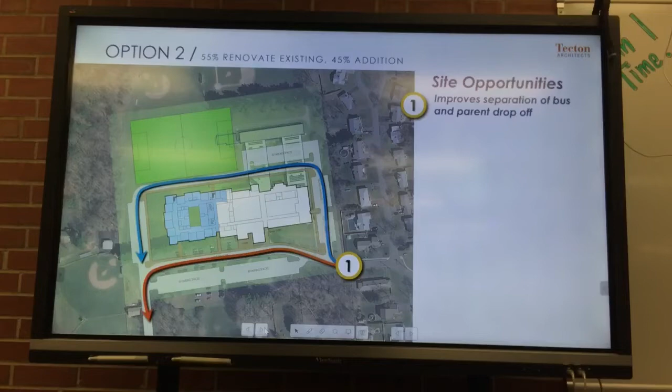Some of the site features are opportunities we'd have to work through, the proper circulation, where to enter the site, where to exit the site. But you could have a loop road where, if the blue was parent drop, you have plenty of areas for queue. If the orange was bus, you have immediate right of way into the site and proper drop on the bus side, a nice straight drop zone in front of the school, and then ample parking dispersed around.

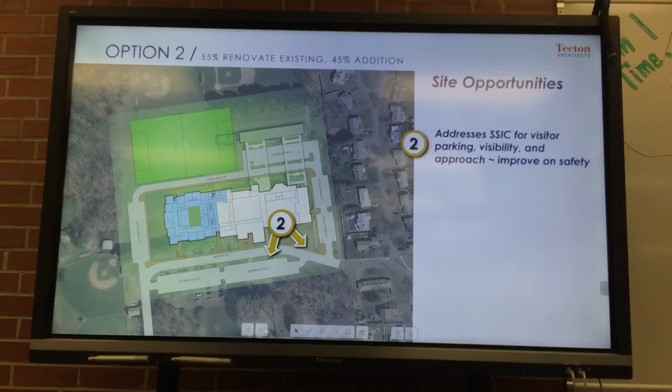If you keep on clicking, we'll go through each of the pieces. One of the benefits is we push some of the visitor parking and the bus drop, the approach to the administration suite, to the entry of the building, a little further away, at least 70 feet away, according to school safety infrastructure guidelines. So that's a benefit.

The other piece is it gives you a little bit more green space around that blue addition. You'll see that green buffer there that, as we spoke to at the last meeting, the reintroduction of outdoor classrooms, or the reconnection of outdoors through the last few years, has really taken hold and will continue to. So this option provides that opportunity.

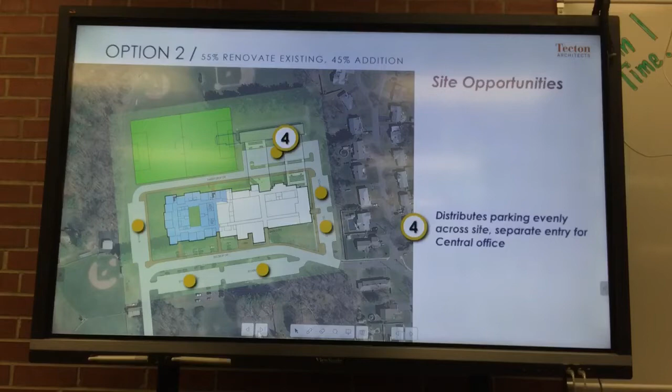As I mentioned, it equally distributes parking around the property. In this particular instance, on the far right, there's two dots there. The central office would take that portion, and you'll see it in the floor plans. So you could kind of compartmentalize the site from a parking perspective and from a traffic delivery standpoint. Again, it's not perfect, but you can at least see the opportunities that exist here.

We would temporarily lose the use of that soccer field, but we could recreate it when we're finished, and that's a representation of that. We would turn it, the orientation a bit, but you'd have some pretty good parking for community immediately adjacent to the fields as well. And then lastly, we tried to maintain, and we heard this at our walkthrough, an improved relationship between the athletic portions of the interior of the space with the exterior play fields. So something that we can strive to achieve on this option.

As far as the building plan, and I have 11 by 17s, I wanted to walk through these, and we'll leave them with you to study at your leisure after this, because I know there's a lot of detail and a lot of things to absorb. So I'm going to try to hit the big picture.

So if you split that plan in half right down the center, the right side basically remains. So we're keeping our auditorium, we're keeping our gym, we're going to keep our kitchen, servery, cafeteria. We're going to completely renovate them, mechanical, lighting, finishes, all that. But we're going to keep those core spaces. It's most efficient to do that in a renovate-as-new approach.

In this particular option, we're suggesting that we possibly relocate the media center, the library, learning commons, whatever you'd like to call it. It really wants to live at the heart of the school and be more open, more visible to the students. So we're taking over the space that currently is art and STEM.

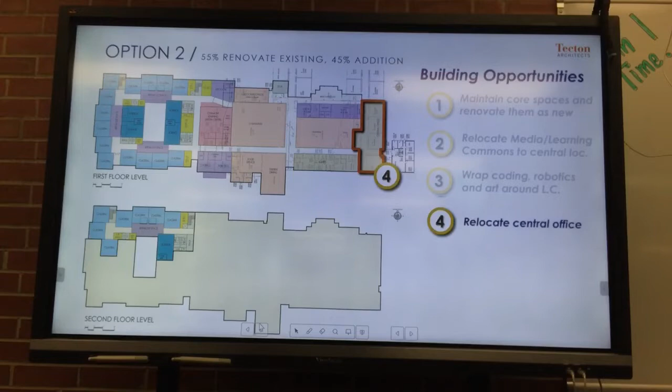Relocate central office to the far end of the building, which on this plan is on the east side of the building where there's classrooms now. That meets about 5,000 to 6,000 square feet of program in their ed spec, so it's close to that number. It could have its own separate entrance, and it could have a relationship, as it does today, to the existing admin area. It's keeping it essentially on the same end of the building, it's just shifting over.

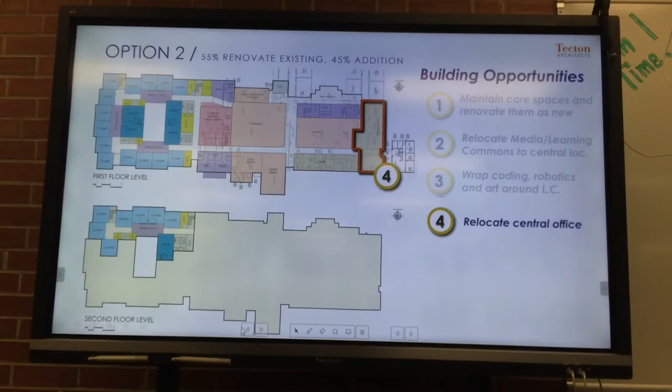When you say central office, you're talking about the central office for the actual middle school? You're not talking about the Board of Ed? I'm talking about the Board of Ed. Oh, you are talking about the Board of Ed. Yes, the Board of Ed. Okay, I wasn't quite sure exactly what to call it, but that orange area, number 4, is the Board of Ed offices.

We would remove the smaller portion that you see there and move them into the building. And then the existing administration, guidance, and nurse area would be completely renovated to resolve all the ills that exist today, but would remain essentially in the same location.

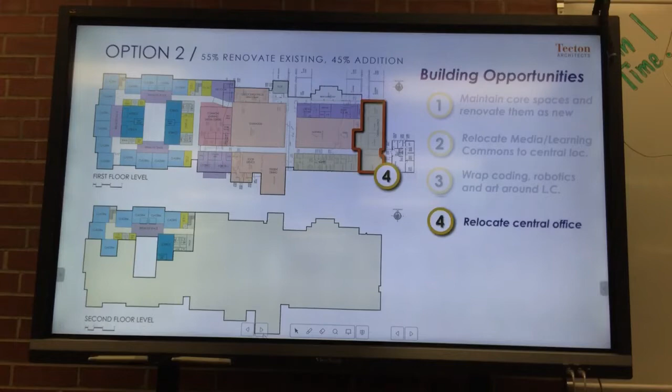The biggest piece in this option is creating what we call a learning community. We're trying to create learning communities by grade level, where right now your current ed spec has 7 classrooms per grade level, plus 2 science, so 9 total classrooms.

What we're trying to establish is some breakout spaces, shown as purple areas in the 11 by 17s, where we push the corridor walls 5 feet in either direction. That supports today's more contemporary learning environments with project-based learning, so students can learn in the classroom, but also in the hallway, working in smaller groups.

We're trying to establish that in this new addition, and you can see it's a very simple circulation, a U-shaped circulation.

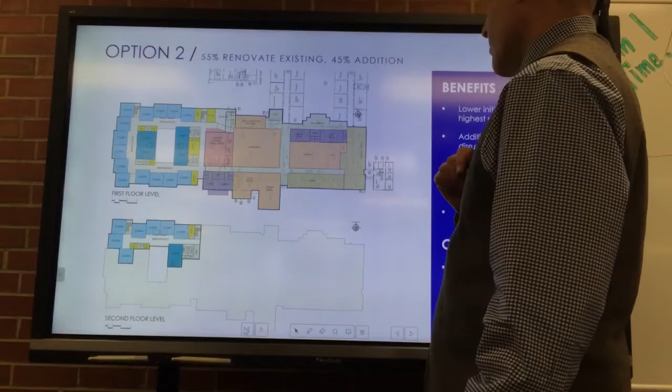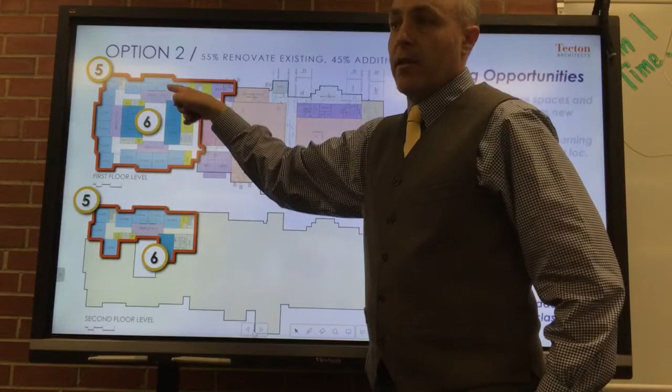What we tried to do is align existing hallways. So this part here would be one grade level, this would be another grade level, with two science rooms for each, and breakout space on all three sides. There's basically a light well or courtyard to make sure all the educational spaces have direct natural daylight.

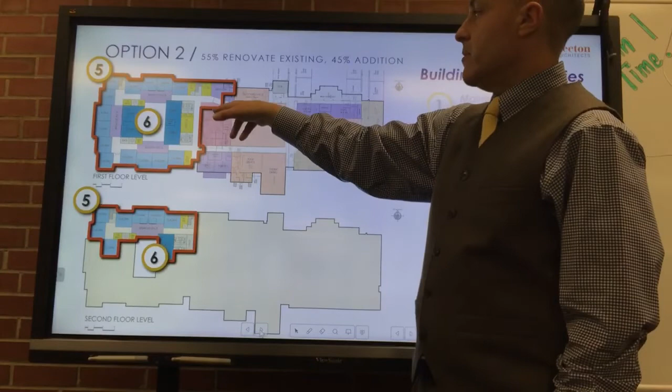The yellow spaces sprinkled around are all the specialized ed spaces. We've learned to push those into the learning communities as best we can, so they're immediately adjacent to the students where the need is. There are larger spaces like OTPT and the SLC that need more room, so we put those over on the side there.

So basically you could do 6, 7, and 8, or whatever kind of structure you want, but that's how this particular addition is arranged.

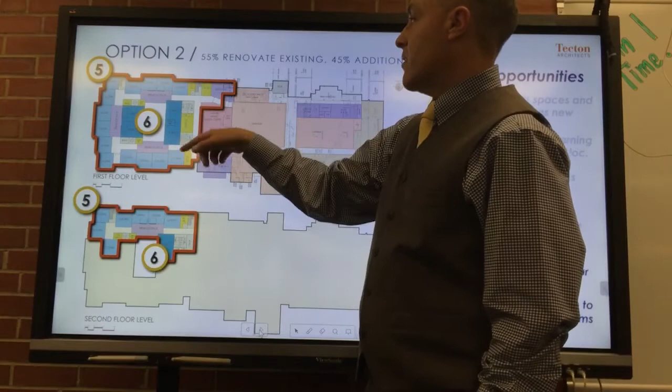Really what we wanted to do, and what you want to do in middle schools, is make sure students can live in their learning community, their age-appropriate grade level, work in teams, and then visit the core spaces without having to travel through another person's neighborhood or learning community. That's what we strive to do here.

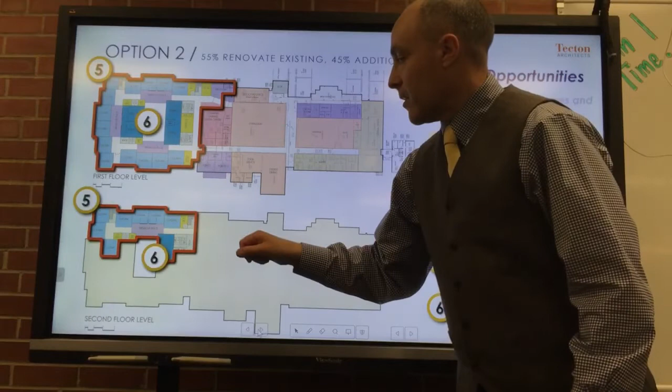It's a little forced on the second floor, a little bit clunky right now, but that could be cleaned up. So this plan gives you that 80... it's a little less efficient, in the 87,000 square foot range, so it still needs to be squeezed a little bit. But that's the first shot out of the box for renovate as new.

There are plenty of other options we could look at. We could leave more of the classroom wings, but what we wanted to show in this option is that you would build this addition first, then swing all the students around into it, and then renovate or modify the rest of the building.

Would the whole first floor be on one level? Because I know you mentioned there's a grade change outside the gymnasium currently.

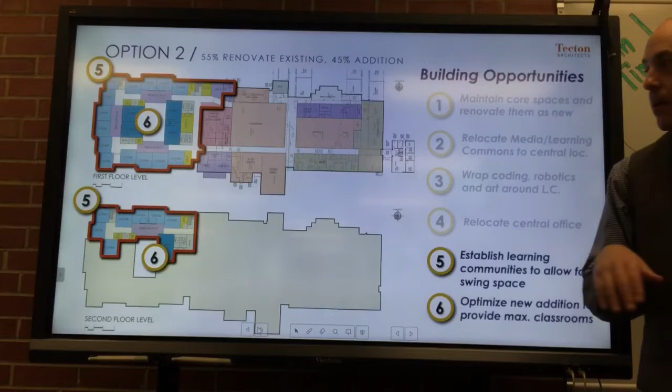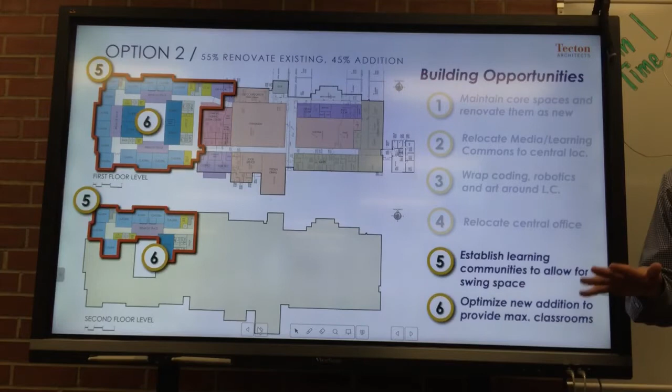So what we would do, we squeezed in some ramps here, and we'd level set the addition down to the grade level, which is about 30 inches lower than the gym. Inside we'd have 1 in 20 ramps, so you don't need railings, a very gentle slope. So to answer your question, this part is about 30 inches lower, with ramps strategically located in these two areas, so there's universal access to all of the core spaces.

We have an elevator and two stairs.

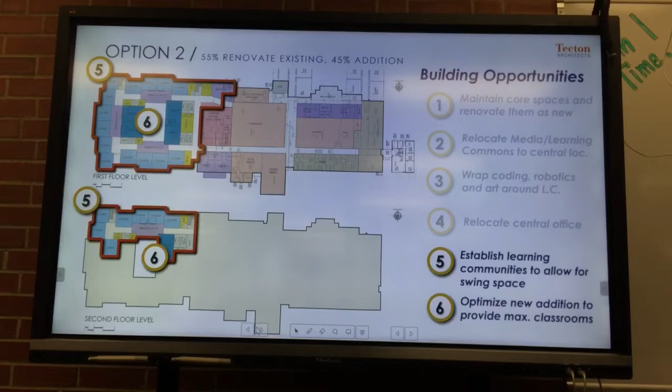Some of the challenges with this option are that we left the locker rooms' arrangement as is, a split level like we walked through at the last meeting, so the challenges related to the locker rooms remain in this particular option.

We'd have to do a little more exploration. I think there's enough room to turn it and push it up and still maintain it in a temporary fashion until we have enough room to find its permanent location.

I would have to understand, the soccer field shown there is like high school regulation. I'm not quite sure exactly what it's used for. It's currently used for high school and middle school players, for this middle school as well as the local town travel league, and all the older teams use it. Right now in the spring, because lacrosse teams use the high school fields, the high school players and older youth players use this field all spring. So that field is used year round.

So that has to stay at that size. Right, because if that field disappears for 2 years, it's a huge impact, since we have other outside people using the fields. The town will lose revenue if we have to boot them off.

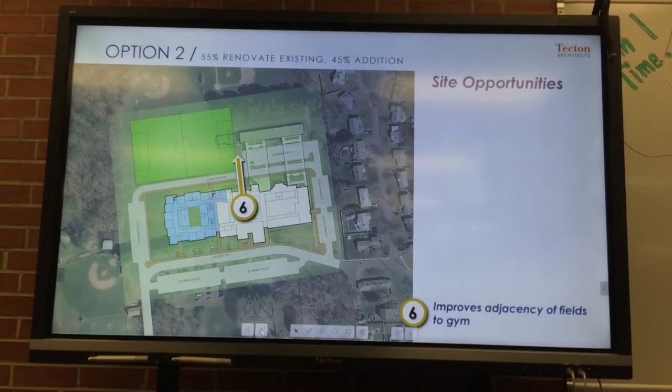So yeah, just to kind of wrap up here, let's talk about some of the benefits and challenges. Obviously, you see a better ratio of benefits to challenges than on the previous one. Of the schemes, this is going to be the lowest initial construction cost. The renovate-as-new, obviously, is going to have a higher reimbursement rate, an additional 10% over new construction.

The addition can be built without disruption to students in the existing school, so essentially we create the swing space ahead of time, eliminating the need for modular classroom buildings. We have good flexibility in terms of 21st century learning because it's a nice mix of both new and existing, with an ability to really rehab what is here.

As we've talked about before, there's a lower operating expense with the reduced footprint from going to this partial second story. The challenges are it's going to be a little bit of a longer construction duration compared to the next scheme we're going to show you, since there are more phases here. So in terms of overall time of disruption to students and staff, it will be longer. And as mentioned, with the existing building you'll have additional work, whether it's the abatement we talked about, the structural systems, or the mechanical systems. Obviously, once you start opening walls you find things, and it gets a little more difficult sometimes to renovate existing.

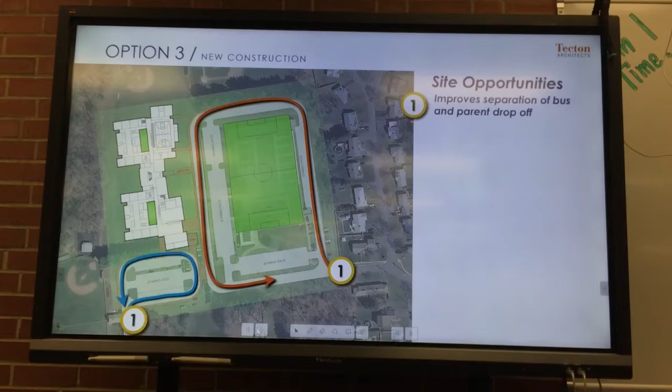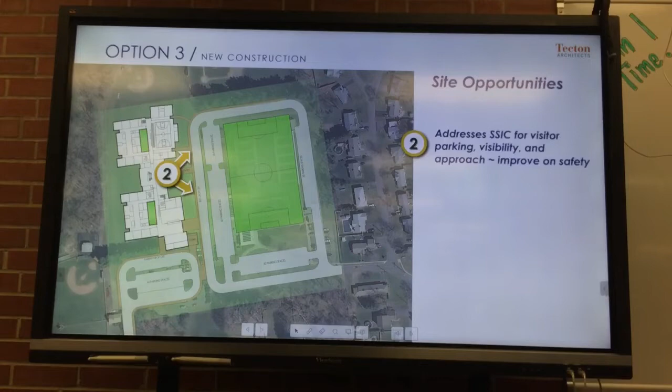This kind of sets up pretty well for, again, a similar loop road. What's nice about this, and I know it might be a little painful to get to this spot as far as construction and phasing, but it does give you good circulation around a community field, good access, good parking - those kinds of things. It puts green field, it puts the building further away from the neighbors and gives you a buffer on both sides, both on the east, which is to the right, and on the south, which is to the bottom of the screen, because it pulls parking further away from everybody. You maintain your visibility from the administration suite across the entire site, so you can see who's coming and going - good site control.

You'll see there's a pocket, a recess there, and that's where the media center is, right near 2 there. So it creates a nice opportunity for some outdoor protected learning. Good transparency through the building.

We did distribute the parking somewhat evenly, and before we get too far into this, the plan does not currently show the Board of Ed offices anywhere, because I wasn't quite sure with a new build, does it want to be its own or does it want to be attached? We will obviously, after these conversations, work that into the plan. I just wanted to make sure we didn't forget about it. We weren't quite sure what the preference was.

So anyways, parking across the board - the parking, I should mention, it's around 180. We can probably get 200 parking spaces easily if it's needed. In addition to what you have today. I thought you had 230 in this. When I had 230 and 182. Okay, yep, I think.

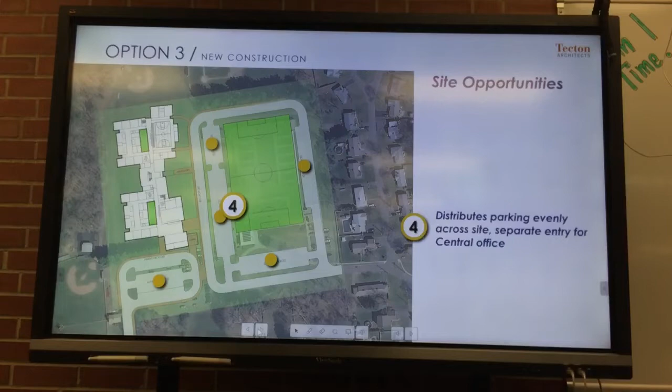This preserves the soccer field when completed, not during, so we'll have to look at that challenge now and see what we can do. The gymnasium on this plan is on the top right, and has pretty good access to fields.

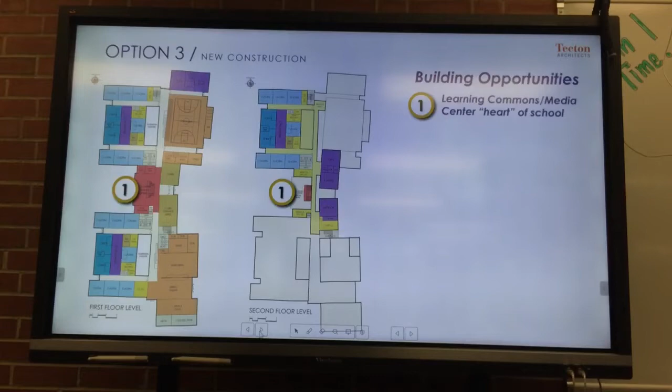So let's walk through the building. Can I go back, I'm sorry - can you go back to the previous slide? Sure. Does this show the bus loop coming in through that neighborhood from the main road, Deer Street there? Can that be tweaked if possible? Oh yeah, so it doesn't have to go through that neighborhood. Yeah, we could flip these - we could have entry through here and exit through there, or we could have only cars through there.

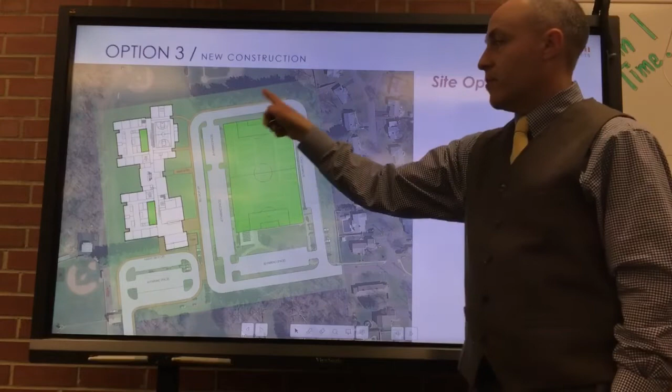It sets up in either direction for parent or bus, so what I'm saying with the addition of some kind of loop in both of the schemes we've shown, it gives you a little more flexibility to control your traffic on site and get it off the road. Okay, yeah, thanks. Sure.

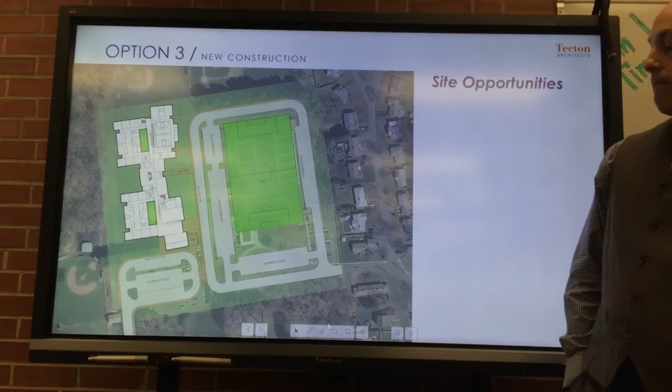Sorry, I can't see if I'm on. You're only coming from... there we go. Okay.

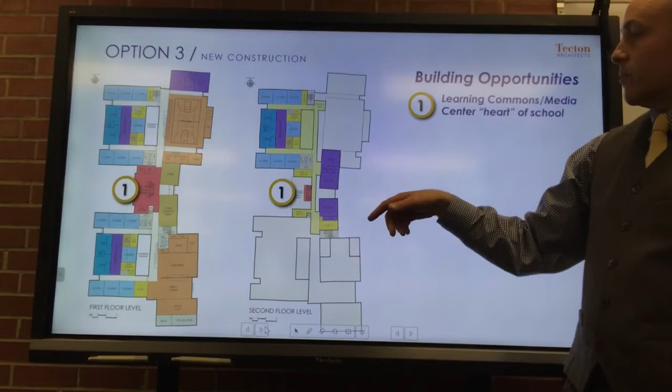So, first floor, second floor. First floor has admin and guidance flanking the main entrance in the center. Directly in the center of the plan is the media center, the learning commons area, shown as the red shaded area. Again, this is really the core space that opens up to all the different learning communities.

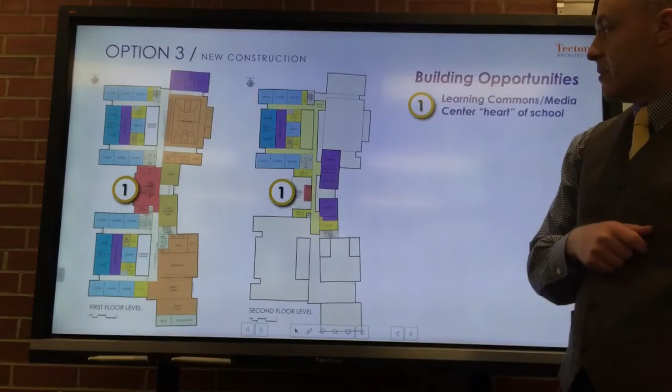Yeah, you can do it if you like. There we go, there you are.

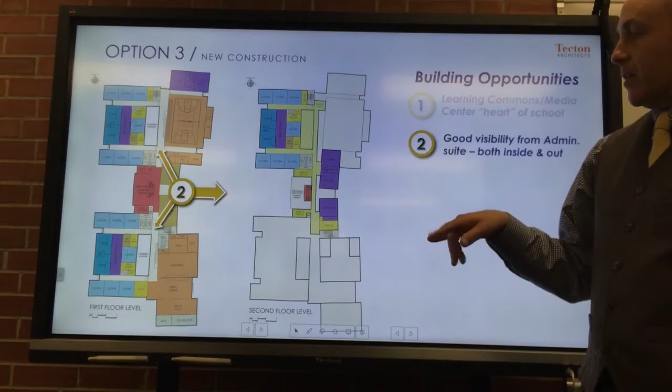So I think the admin placement in this particular plan gives you good visibility both on the outside but also inside the building too, with some pretty good view corridors down to each grade level.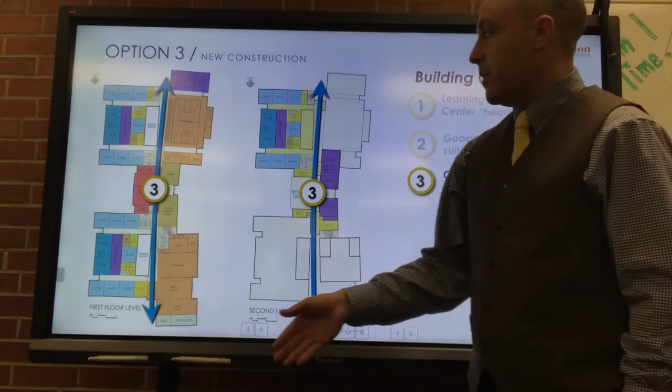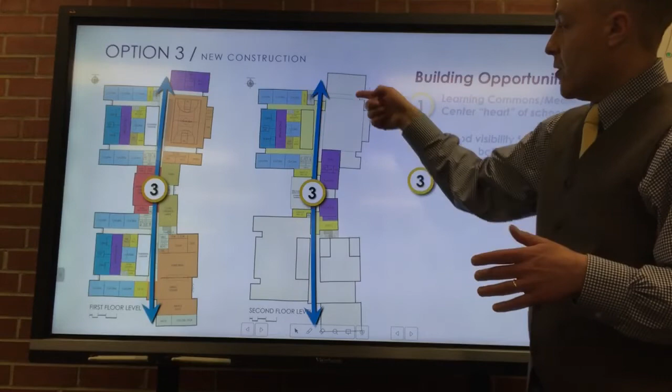What we did here is create this main street, if you will, that organizes the building. For about 60-70% of this hallway, it's a story and a half, double-heighted space, so there's lots of natural daylight coming through.

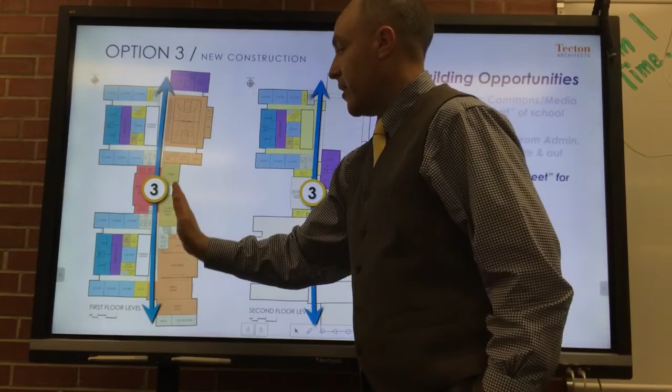Programmatically, you have all your community core spaces on the right side of the plan, all the oranges, which could easily be separated for community use, and then you have your classrooms and learning communities on the left side.

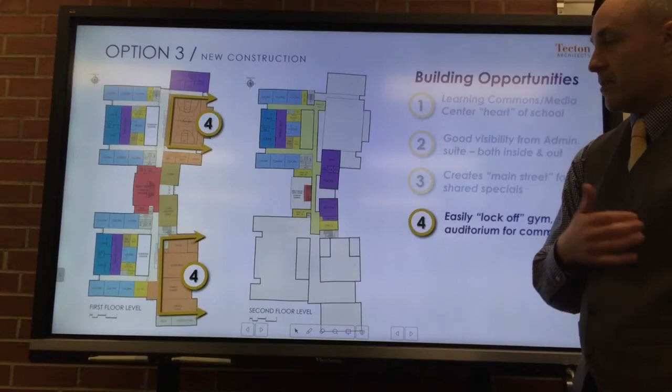What's nice about putting some of the public spaces out front is that they can be somewhat similar to what you have today, but a little bit cleaner. You have the cafeteria, auditorium, stage, and gymnasium. Schools are community buildings that could really leverage community use if arranged in a fashion like this.

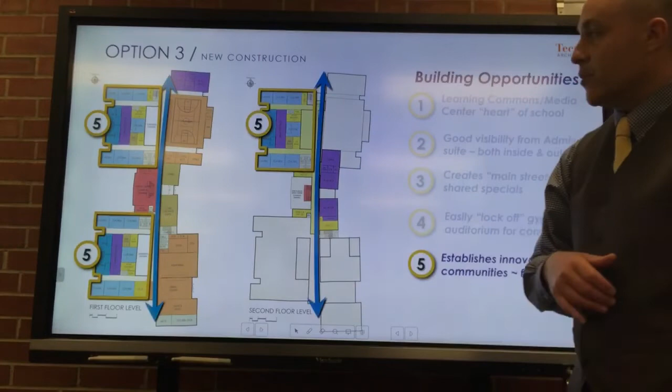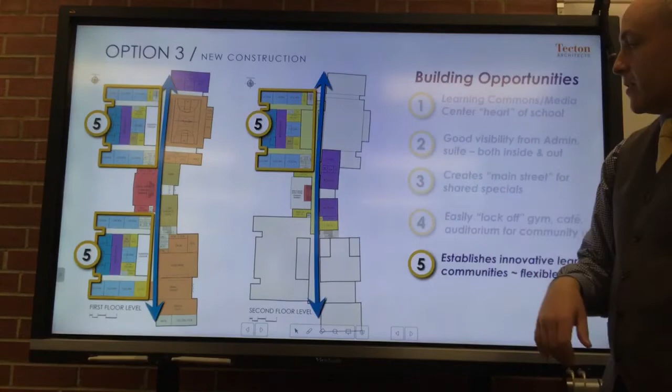So I have an enlarged plan to show what's going on in this neighborhood, this grade level. There are 3 grade level pods, 7 classrooms. This sets up a little cleaner organizationally, with 2 science rooms and then special ed. I think the next slide is going to zoom in.

So you have basically everything you need in this learning pod. We can rearrange the yellow, but there's special ed, small group rooms, a sensory room, and conference rooms.

We have gender neutral facilities within the neighborhood, and toilet facilities that stack and are very efficient from floor to floor. And then you see - I think this might have been a change in the ed spec from last time - talking about some flexibility from room to room.

What we're trying to represent with the dotted lines is the ability for these walls to either open up this way or that way, so that you have a kind of large breakout space.

When we walk through the building, there are 2 teams per grade level, so it could be an interesting kind of community center in this arrangement.

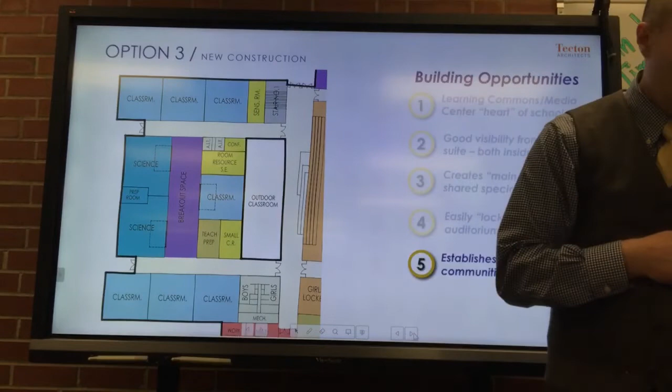And then classroom number 7 could also be used as a flex classroom, depending on population swings, if you need it or don't need it.

That purple breakout space - you're saying that would otherwise be a pass-through hallway, but you can close it on the ends? Yeah, it's basically about 20 feet, so it's a pretty good width.

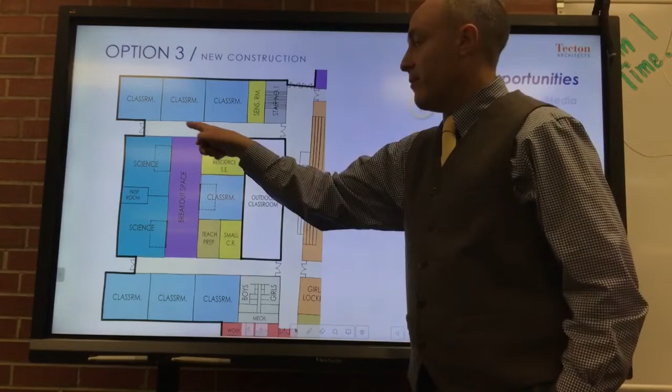What we're trying to do, and you'll see in more contemporary learning environments, is more glazing along these spaces, whether you slide it open or slide it up, so this becomes a very project-based, interactive zone. Then you have your more traditional classrooms on the end. It gives you that built-in flexibility you see a lot in today's educational environments.

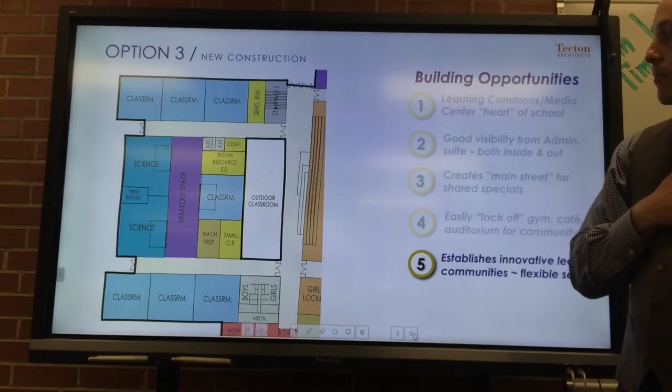Does that answer your question? In this design with the outdoor classroom, it looks like it's contained within the building, almost like a courtyard. It is, yep. What does that look like?

As we were walking through and looking at the courtyard, there were comments like, yeah, it would be nice to use this space, but how do you get a lawnmower in there, and those sorts of things. So how do you maintain an outdoor classroom that's contained inside the building?

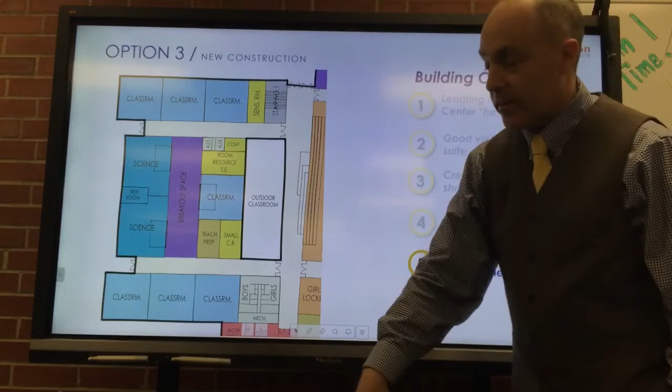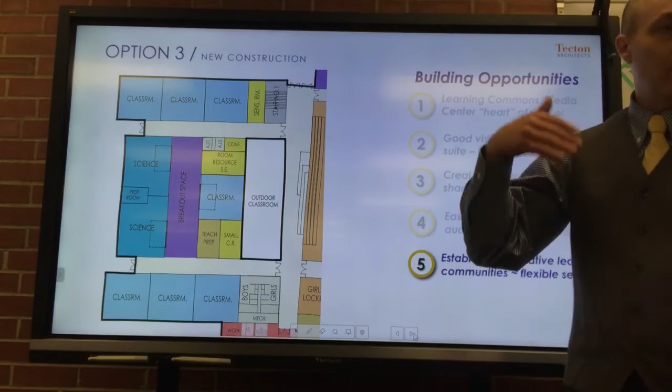There would be no roof on this, and the intent is to have glass to let natural daylight into this main street area. We believe this proportion will work better from an educational perspective because we don't see this as a grass field, but more of a combination like an atrium, except without a roof. So there are hard surfaces where you can start to see what we're representing here.

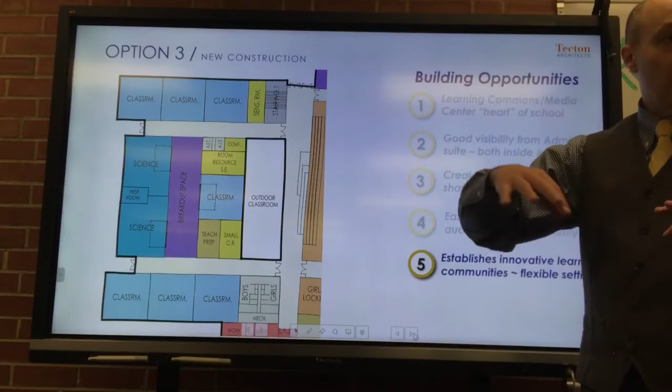The gym is on this side, so those are the bleachers. This is the hallway, where we set up benching and seating so you could take two classrooms, and if they're giving a presentation, they could come out into this area. It's a combination of doing certain things within your learning community, but also showing other grade levels what you're working on so they can learn from each other. There's a layering of those types of spaces in this plan.

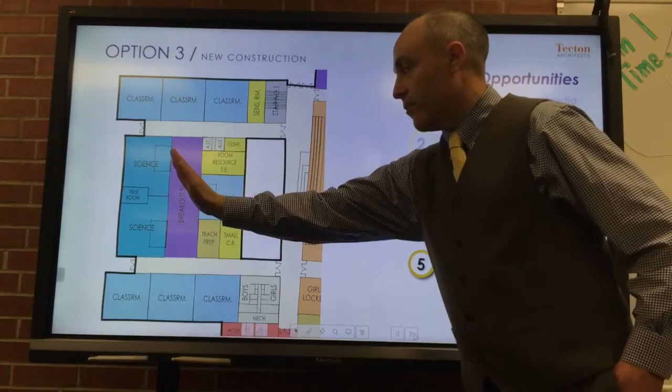So long story short, we see this more as kind of an atrium-like space, so it's more usable.

Does that count towards the total square footage? No, it doesn't have a roof, so it doesn't count. It's outdoor space, which is tricky.

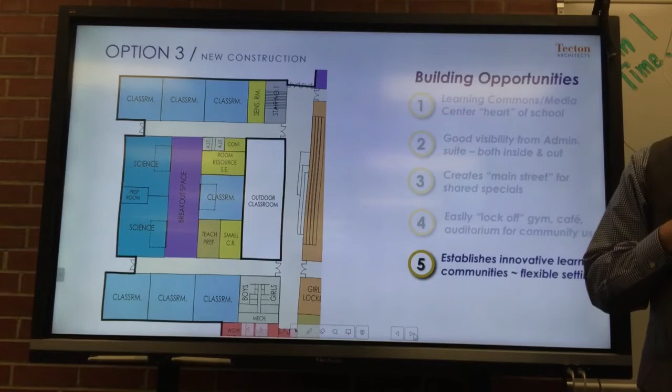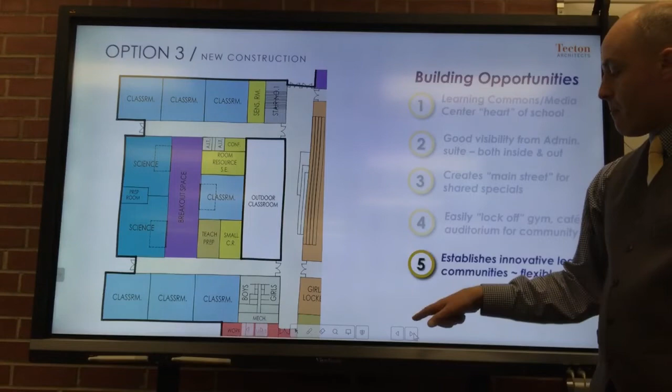It's natural materials, but ones that are easier to maintain. It could be stones, pavers, or low ground cover that doesn't require mowing—things that still give you the feel of a natural environment, but without having to drag a lawnmower through the building.

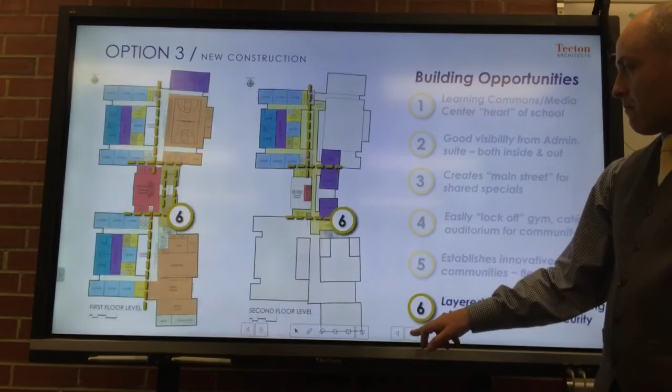So the last piece, and it's kind of a subtle one you may not pick up: obviously safety and security are huge—school guard glass, all the controls, all the cameras, all those things. We like to look at our buildings early in the conceptual design phase through a philosophy called CPTED, crime prevention through environmental design.

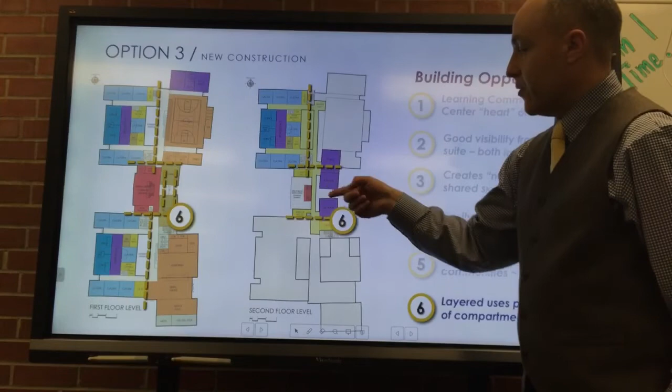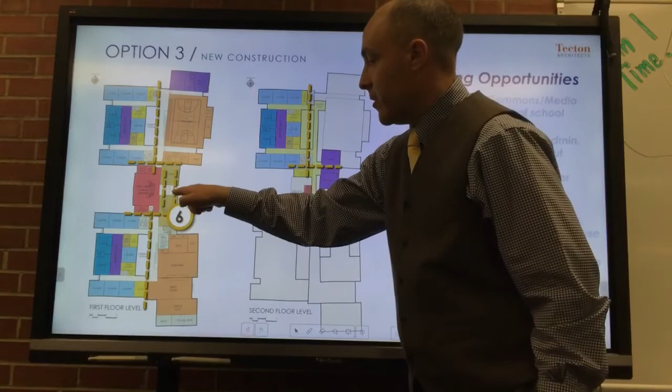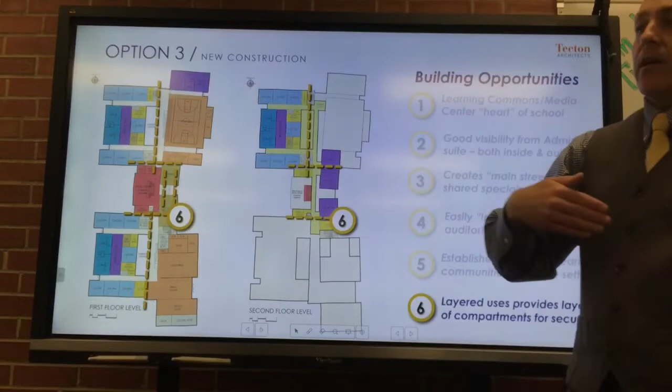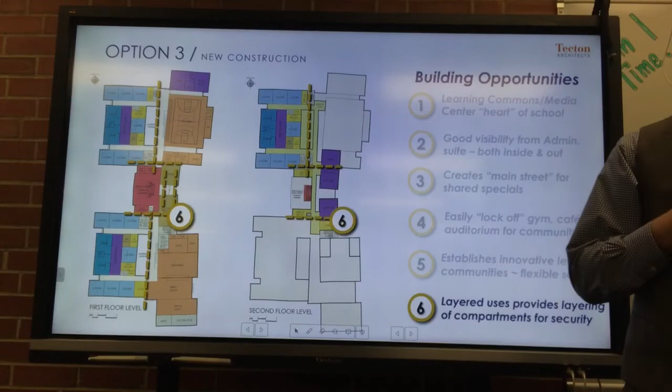It's about delay, deter, and compartmentalization. What these lines indicate is the idea that as you move further back into the building, it builds an inherent level of safety through doors. At the main entry, you'll have to enter directly into the admin suite, and these dotted lines indicate that as you move through the building, there's another layer you're going to have to get through. That's a piece we build into all of our designs, but wanted to highlight on this plan.

And I think—Eddie, if you want to. Sure, the highs and lows.

Basically, in terms of disruption to everyone, this is the simplest to phase in terms of building all the new space—it's the least disruptive to the learning environment while it's going on. It's the shortest construction period, with the most flexibility in terms of getting the latest standards for learning spaces, the lowest operating costs by really maximizing that second floor area, and because of the condensed footprint, it allows the most opportunities for site development, giving you more freedom. The biggest challenge, of course, is cost—the price tag will be higher initially in terms of total project cost and cost to the district. But we'll take you through what those are.

Just a quick question—would it be a fair statement to say that in the future, if we had to expand, we could add another floor on top of that space at the bottom right?

Yeah, it's a tricky one. Obviously it could be designed to handle the loads, but there's still sequencing involved because you're swinging steel to build on top of it—you don't necessarily want to do that while students are occupying the space, so that would have to be thought through. But in terms of could you build it in—yes, you can see the two wings are essentially the same footprint and they stack, so could you build on top of it for future expansion? Absolutely.

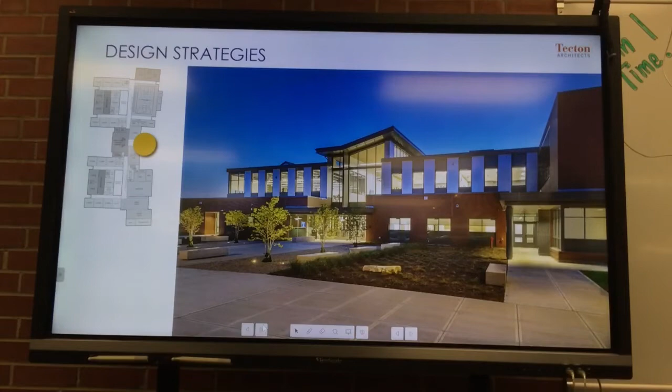Okay, so the next series, and we'll go through them relatively quickly, is just photos representing what we see. That's the entry to the facility, to the school, or what it could look like.

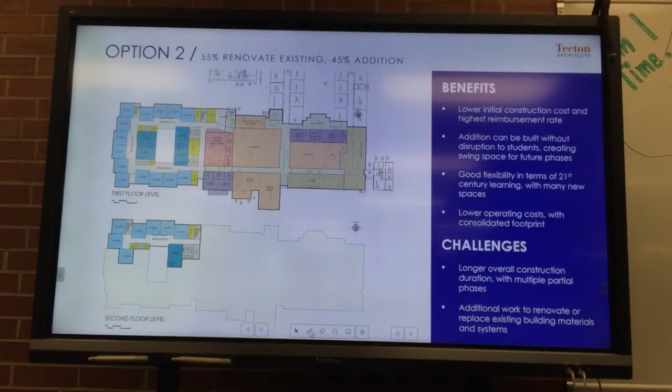I think that's an extra slide. You can skip that one. We have a few extra slides. All right, okay, can I ask one more, I was waiting to the end to see if we have it.

Can you go to one of those aerial pictures? What is our actual property line that falls within the middle school? Because we're on 18 acres, or what's the acreage that we have? What are the borders, I guess? I don't know if it goes around those baseball fields, or is that town property? At a minimum, it's here, but it's probably a little further back. We could get that after. I was just more curious.

I've got a question on the second floor, back to the outdoor space. How do you have outdoor space on the first floor and the second floor in the same location? Or was I missing something on the second floor? I know this isn't the final design, but when you've got the two floors, it's just on the ground floor. Yeah, it's open to below.

So do you have the second floor outdoor space over here, and it's just, I think it was probably mislabeled. It should have said open to below.

So the top one is really a two-story kind of light well, and you only have the outdoor space at grade level. Okay, got it, thank you. Yeah, it's a good question and a good catch.

Is that the space outside the media center? No, there's a communicating kind of grand stair in the center there that is intended to be kind of bench seating, both a stair to get you up to the upper level, but also bench seating for reading and lectures and visiting authors to give presentations. That wasn't the theater.

We had talked about putting the theater outside. It's a great spot to put it, this would be an excellent spot to put it. Size-wise and program-wise, yeah.

Not to harp on it, but I wasn't here last meeting, sorry, is it some kind of canopy thing, or is it just completely open to the outdoors? I think it was supposed to be completely open. The original idea was that it would face the back side of the auditorium, so there'd be a shared stage.

So the back end of the auditorium would open up to the backstage, and that stage area would be a stage area to the amphitheater. But I think in this layout, that would not be possible, because you'd be sitting in the parking lot.

We could look at that if that's of interest. You're saying a dual purpose stage? Actually, there's a little green area there, you just need to nudge it out a little further.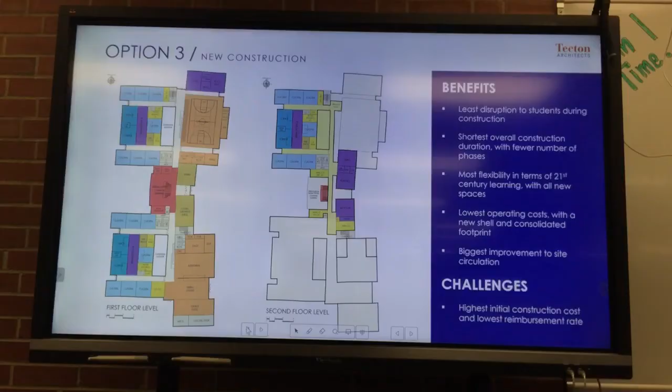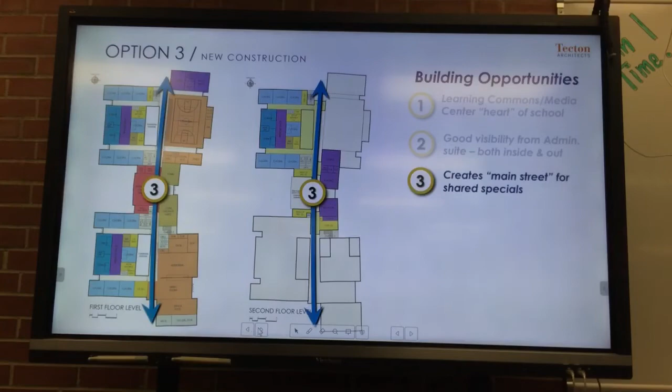Do you have something similar, comparing each option to the ed spec, as far as what we asked, like what percentage are we going to comply with each of these options? Again, the ed spec would need to be met regardless of the scheme. Okay.

I'm just having a hard time envisioning how you're going to meet it all with option 1. Like, how are you going to squeeze in the extra bathrooms, and how are you going to squeeze in all this other stuff?

Won't be easy, I think. But that was all taken into consideration with the ultimate estimates. That's a good question, because I think the ultimate reality of option 1 is going to be that you can never reclaim the inefficiencies of that big loop.

So either you're going to go over your maximum allowable to get those spaces in because of the inefficiency, which is likely the case, because it's very difficult to make an existing building as efficient as a new one. So it's very likely that we'll go over the maximum allowable with just a renovate with option 1.

It's kind of cheating a little bit, but not really, because you're trying to maximize what we call the spaces in between. You want to maximize that use because you have to pay for it anyway. And you can divide up the 83,000 any way you want, kind of, but if you go over it, then you're 100% out of pocket. So we're trying to balance all of that with all the programmatic spaces.

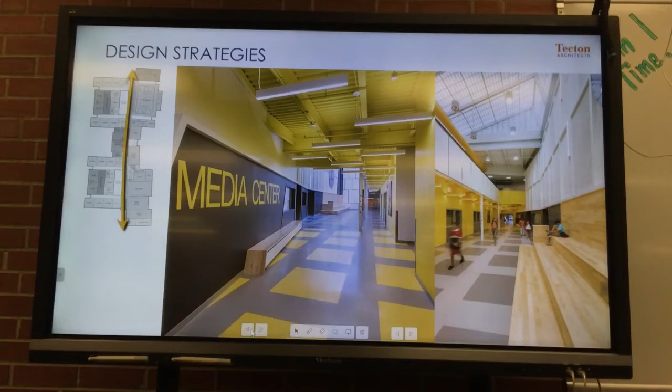This is another way it can be done, by building widened parts of the hallway, whether it's a fixed, tiered seating like this, or more of a combination of soft seating and mobile furniture. There are areas essentially ancillary to the circulation where space can be carved out. Can you go to where you have the auditorium and the cafeteria, can you then open up into a double space? I'm having a hard time conceptualizing how those two areas can work together. Is there an enlarged plan of that?

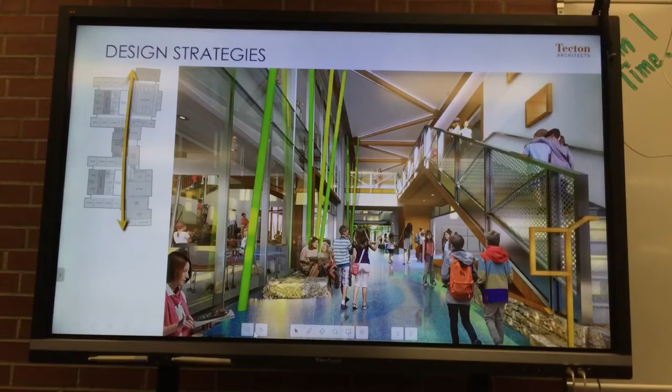While he's handing those out, on the renovate as new option, are there roof replacements required on the renovated areas? And if so, would we take a reimbursement hit? Have they had their 20-year life cycle? I believe, Tom, are there any roofs that are more recent than 20 years?

The newest ones are 2009. Okay, so yes. I guess the question is, would you, any place where we're going to have to replace a roof that is less than 20 years, yes, there is a little bit of a hit on the reimbursement.

I can appreciate the time crunch you guys are in to not be able to research everything we're dealing with. But if we take even a $1 million hit, we're only talking between new and reno new of $7 million. And when you start taking hits on your reimbursement like that, those things add up.

As a follow-up, either one of you, were you tasked to do any type of life cycling cost of operating cost over the period of 20 years for whatever option we pick? Have we done that? No. We can take a look at that.